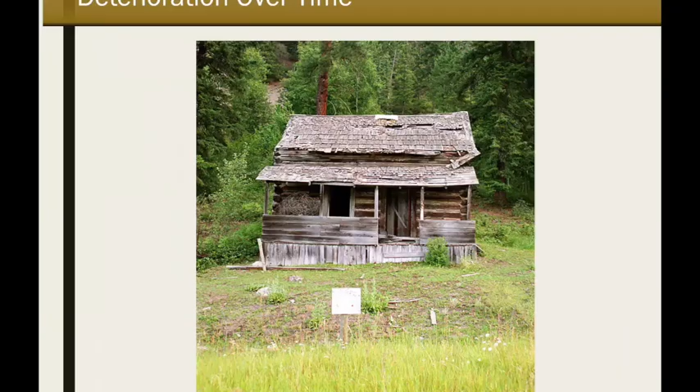Imagine yourself living in this home. Imagine what it would have been like if you'd been living here when this was a brand new structure, when the condition was top notch. The roof was whole and there were no leaks and drafts and so forth.

They were probably there now. As you think about what it would have been like to live here in this home, in this building, do you have any idea of what you would have done to maintain the condition of this home? What would be some of the activities that you would have undertaken? Had you given any thought to how long this may last, or maybe how long you want it to last?

Those are, I think, interesting questions. They may be tied to what your purpose is. Are you going to raise a family here? Or maybe this is just something to visit occasionally. Maybe this is a vacation home, and that affects how long you think you want it to last.

But these are the kinds of questions that I think come up all the time when we own something, and we'd like to take care of it and patch it when it needs patching, repair it when it needs repairing.

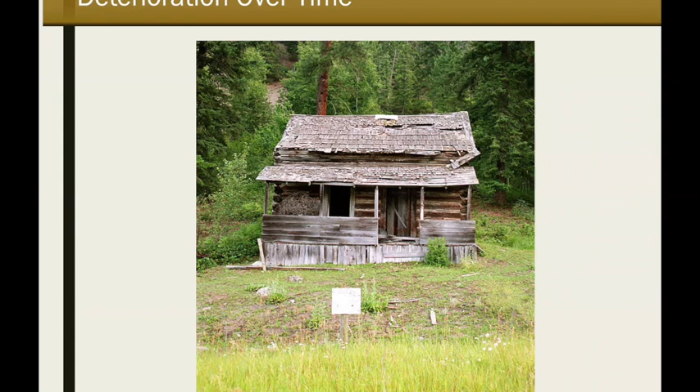So there's probably some science here somewhere that we can start to think about, just on moisture alone. Of course, there's other things involved naturally that determine how a deterioration process will take place. But in this facility, in this home, obviously there's moisture from climatic conditions, from rainfall and whatnot. And we know that when temperatures are different enough that a temperature on one side of a wall, for instance, drops below the dew point, we get condensation and we get moisture forming.

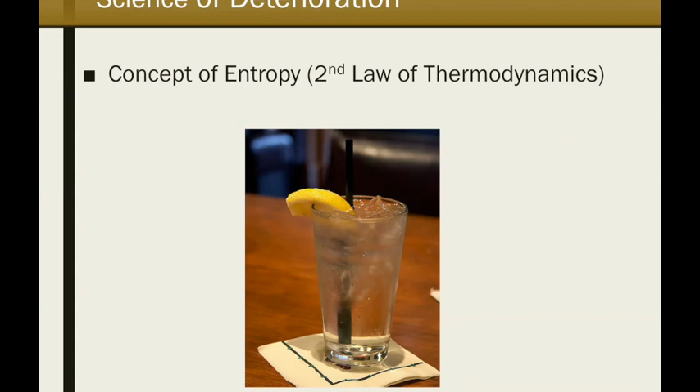So it seems like in one way or another in our infrastructure, moisture comes into play. And that's kind of what I'm getting at today. It could be that the original moisture problem for highways was here.

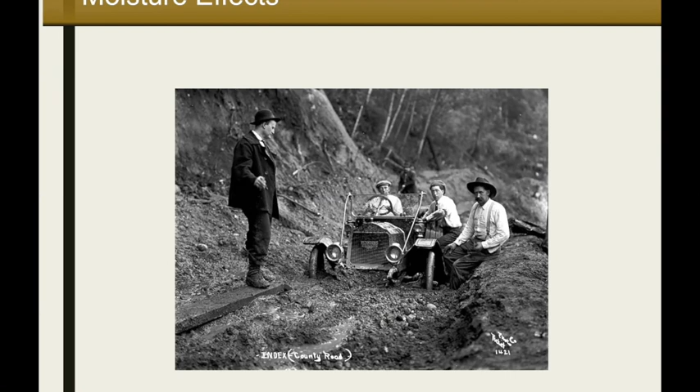When it's not wood anymore, it's soil. We've got a problem here of having to improve the soil layering so we can make it trafficable. Again, we see moisture coming in and having a play here on what we want to get.

As far as our pavement systems go, they're often layered, and the surface of the pavement is the one that's got to be the toughest and generally have the most strength. So we started making our roadways with some type of hardened surface to counteract this problem. That's what the saying of the day was: get the traveling public out of the mud. Well, we do that, and it seems we still get into other things that become important, that inevitably are affected by the presence of moisture.

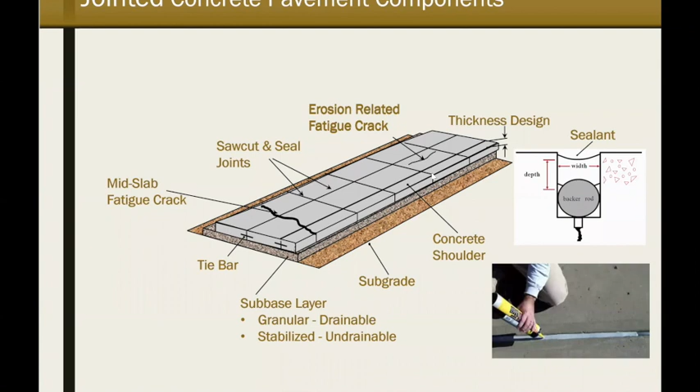In a continuously reinforced pavement, we're not necessarily sealing these cracks. There are joints, longitudinally speaking, that need to be sealed, but they don't move to the extent that a transverse joint in jointed concrete does. So those are some of the differences. I point this out mainly so you understand that the behavior of a concrete pavement system is very important when we talk about its sustainability.

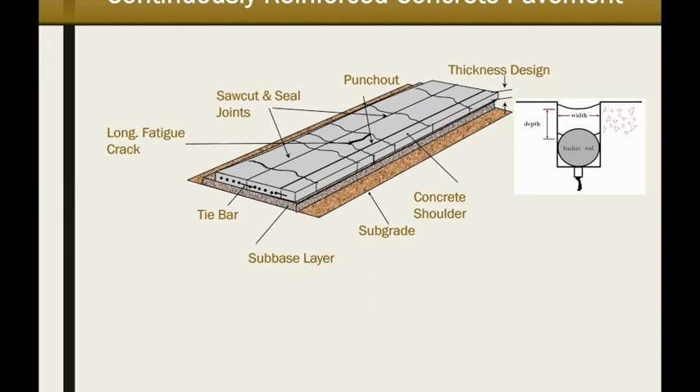In either pavement type, there are systems we worry about in design. One is the jointing system, which we've talked about a little, and there's also the drainage system of the pavement. That's so important. We haven't done much in modeling drainage as much as we need to, and connecting the dots between that and the durability of the system.

But I think we're getting to the point where we can do that, and it's going to come through consideration of the effect that the slab has on the base layer that's supporting it.

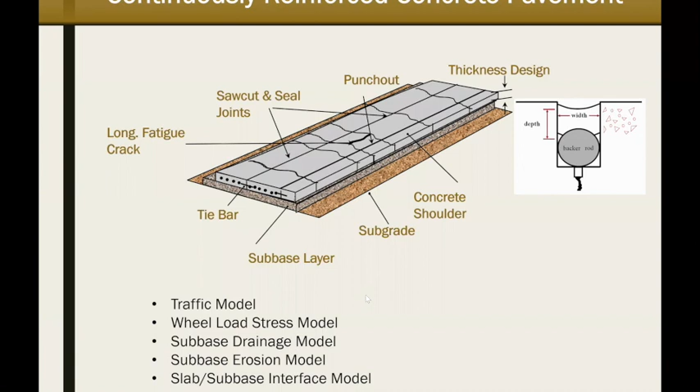This is quite an interesting topic for the concrete pavement community, because there's not a lot of agreement as to what the best subbase design is. There's still a lot there to be explored, and I can't overemphasize the durability aspects the design of the subbase has on the entire pavement system. I'll try to allude to some of that today, but anyway, we've got different types here, and different systems at play.

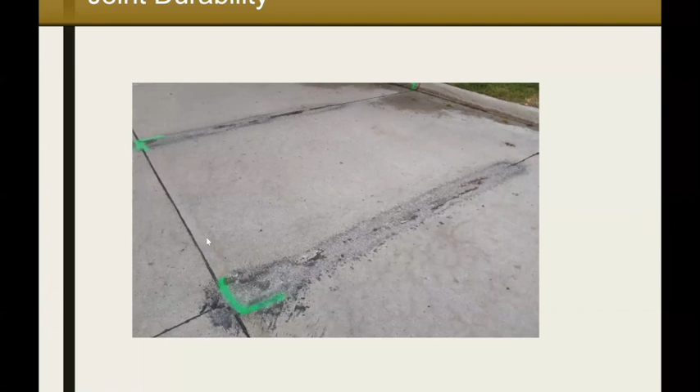But it goes back again to the presence of moisture and what it's doing. Obviously, there's something very wrong here that's gone on. Can we do something to limit that? If water is being trapped here in these areas, can we do something to limit that? I mean, this is really the question I have when I look at this.

So let's just talk about the joint sealant system a little bit. I'm going to review here with what some of the research has been, some of the research that I've been involved with as well. Just mainly as background information on this aspect of the concrete pavement, but this is again a schematic of the jointing system here, and we see again the sealant here.

This is in combination with this backer rod that I mentioned before, and this is a way that the material is shaped. Now, it's normally poured in place. There are preformed systems that are there as well. Of course, they don't need a backer rod if they're preformed, but the ones that are not preformed, they're normally placed with this, and it shapes it in a way that we think optimizes the state of stress.

And so a lot of the research has been focused on what those stress levels are in the sealant system. In our research, we've gone back and revisited a factor here. It's called the shape factor. It's a very simple geometric term. It's just simply the width here divided by the depth. And it's a way of characterizing the installation for the material.

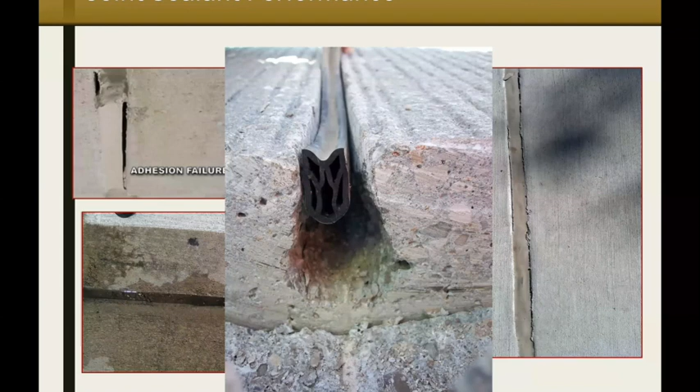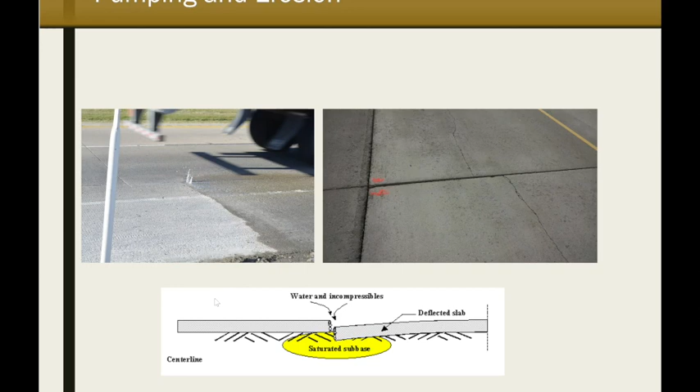This is really an unfortunate situation as far as this discontinuity and jointing goes. Some of our studies in the LTPP database have shown that areas experiencing the most rainfall, their concrete pavements are also experiencing quite a bit of joint faulting. So it really brings into question how effective our joint sealing operations have been. It seems their effectiveness hasn't been what we thought it might have been, and they're certainly not what it should be.

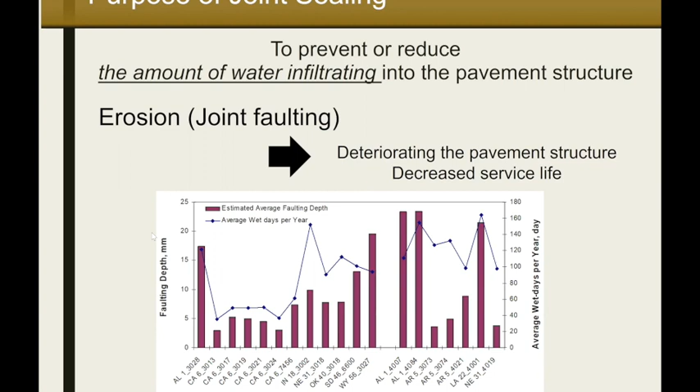This is the effect, the problem of durability and the effect of moisture on concrete pavement across our entire nation. It's not just in Wyoming—this is everywhere. And our design methods, I think, are still not to the point where they need to address this. Design has mainly been a structural activity. It needs to be about durability as well.

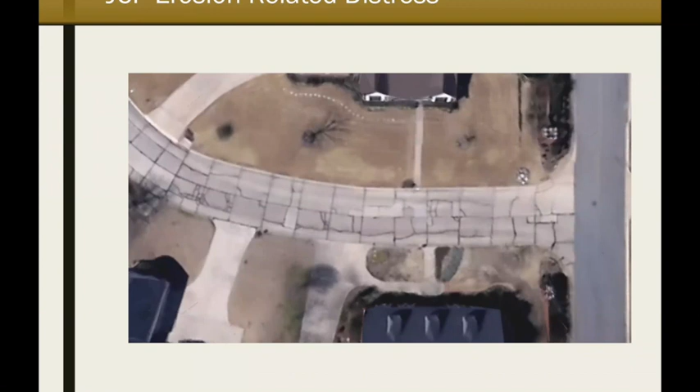Well, I think particularly on this erosion issue it's about understanding a process. I'm going to talk about that a little bit more later on, because right now we're talking about the sealant. But there is a process, I think, behind any deterioration, whether it be a bridge, a superstructure, or corrosion. I think there's a process there that we can all understand and try to incorporate into improving our ability to design and predict this.

In this process, first of all, there's water there—how did it get there? Then there's the material itself, what its resistances are, and then the things that are causing the stresses, which in this case is traffic. These are some of the main elements, and there could be others, but these are the ones that come to mind.

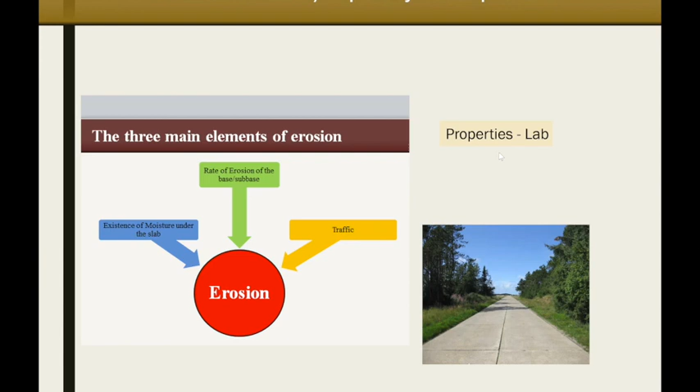So while we're talking about this process, hopefully we can find the lab protocol to help us determine the properties involved. So there's a laboratory component, and then of course the modeling using these properties we've determined, and then the performance.

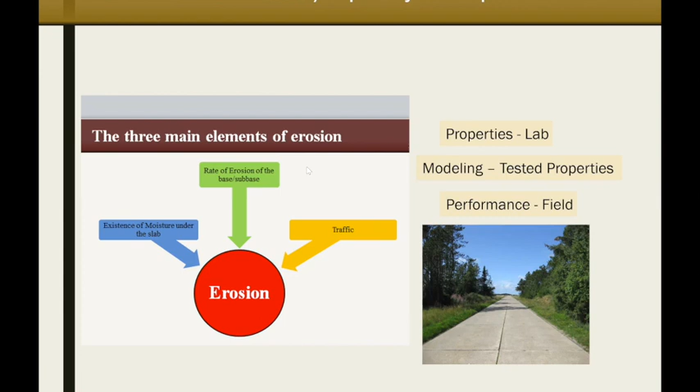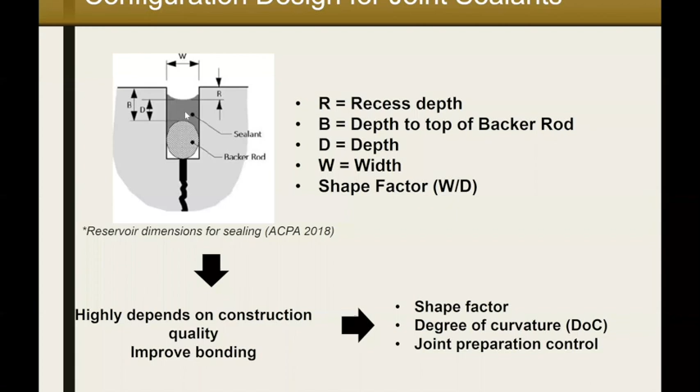All right, now back to the joint sealant. One of the things in research is that over the years we've mainly looked at the sealant material itself and how it stretches. What we've tended to overlook is how this stretching affects the ability of the material to bond to another material. In this case, its bond is what governs the performance. As I alluded to earlier, it's not the ability of the material to stretch and elongate, it's the ability of it to bond.

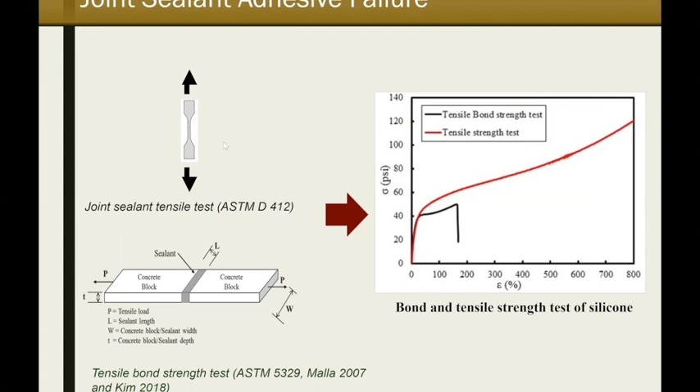I won't say that it can't bond—I'll say that it hasn't bonded, and we have to look at that. In our research, we're looking again at the shape factor, and then we introduced another one here that might be useful, which characterizes the curvature. So we think there may be another factor here that could become important in the design of the system.

I've got some slides here showing combinations of the shape factor and the degree of curvature, and they're saying about the same thing: you can affect the ductility of the system, and you can affect the stress level by manipulating either the shape factor or the degree of curvature.

I won't say how we got different degrees of curvature. It is representing this depth here. We did some specimen preparation in order to do that.

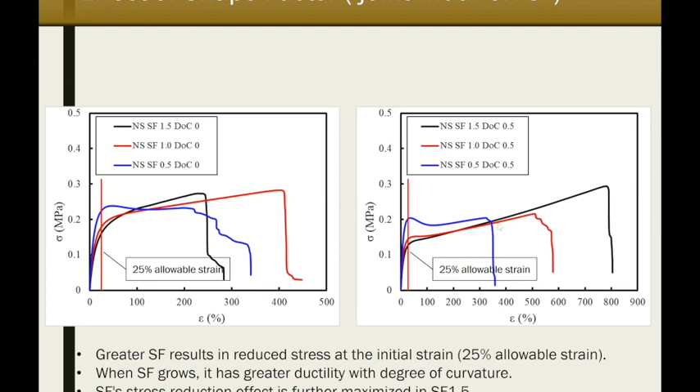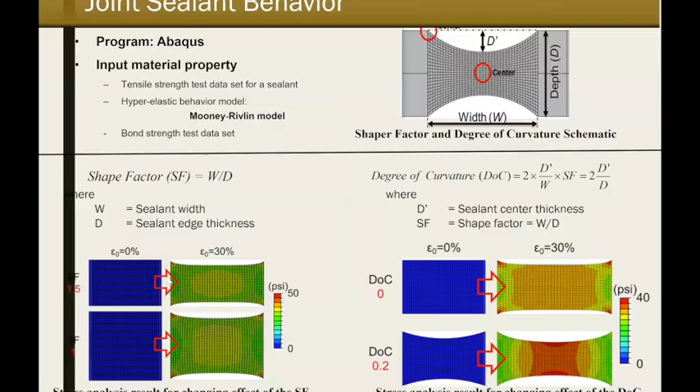Looking at our test results, one conclusion we've come to is that we can adjust the flexibility, which is really the strain level, and we can affect the stress level. But the ultimate factor that overrides all this is what your allowable limit is. Interestingly, if you look at the manufacturer's data, they talk about 100% strain, even 150% strain. But what we're finding is that we can only go to 25% before we're exceeding the capability of the material to bond to the surface of the concrete.

Can we improve that? We ought to figure that out, because it could make a difference. Right now it's pretty low, I would say. And this doesn't even mention the width of the joint or how deep it is—that's what the shape factor is all about.

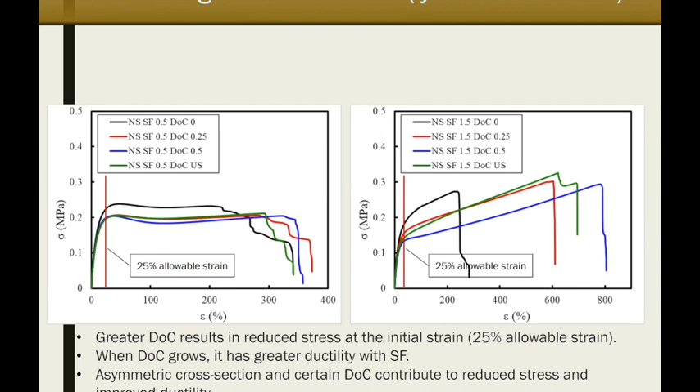Interestingly, today a lot of agencies, if they're sealing, are only cutting the joints 1/8 of an inch in width, or maybe 1/4 inch. If they cut them 1/8 inch, it's really hard to seal them—I'd say they're probably not sealing. But 1/4 inch is pretty narrow too, and when you try to prepare it for sealing, it's really difficult to do.

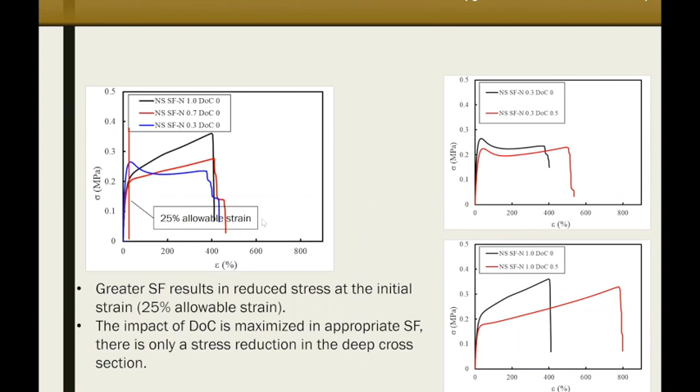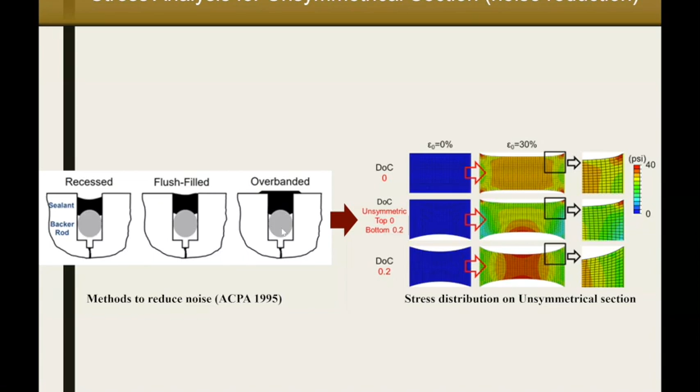But again, the backer rod is there to reduce that stress level. What we found is if you go to this overband option, again to reduce noise, you may as well skip the backer rod, because it's not accomplishing anything for you. This dominates the stress picture, and as a result it debonds at a lower strain. The backer rod doesn't have any benefit at all. So if you're going to do that, don't worry about putting the backer rod in—you're just wasting money.

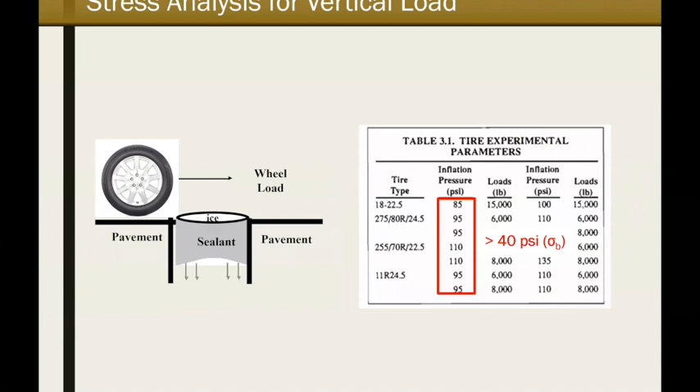Another concern, again in western areas with snowfall, is the buildup of ice on the sealant, and then the load passes over and pushes it down vertically. We're finding, as you might expect, stresses are going to be very high in the corner, and we need deflections of about 80 to 90 mils before this limit becomes a factor.

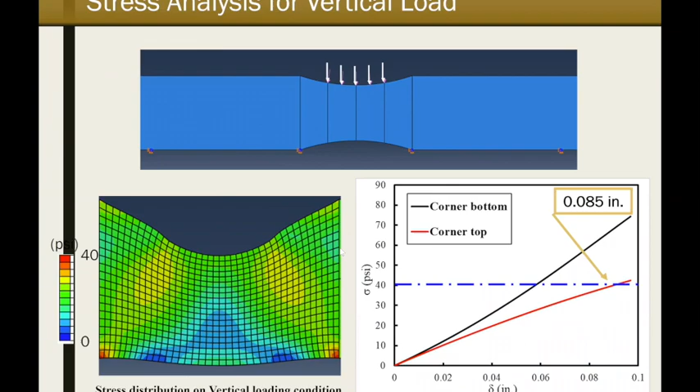So these are just some of the things we've been looking at. I don't have any real conclusions from this yet, but it does appear that there can be an amount of deflection and shoving before it becomes a problem on bonding. We're carrying out bond testing, and I think it's going to change the picture a little on how we design the sealant. One thing it will certainly point out is we've got to do a better job getting the bond to occur, because of the effect it has on the ability to resist infiltration.

And I'm running—I've got to get going.

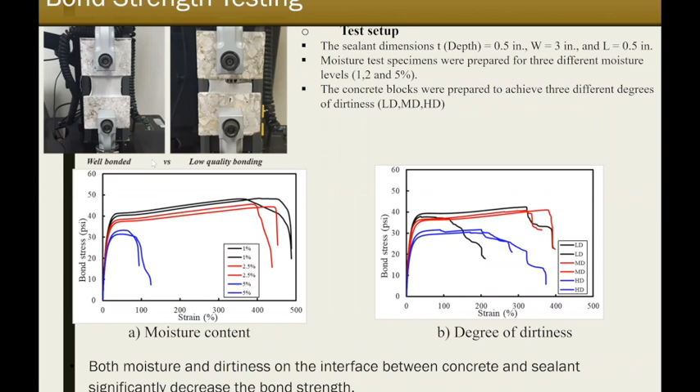Another system I've mentioned is a sub-base, and I don't have enough time here to really discuss it. There are many issues, many factors we have to worry about in order to get a durable sub-base system to support the slab.

Now, we know temperature and so forth will cause it to lift up and separate, but there's also a set condition that gets built into the pavement initially, and I don't want to explain that. There are many interesting aspects behind the construction that I'm learning now, and I think we need to start paying attention to them.

But obviously, the key to support is contact. We have to have contact between the slab and the base. And if there's water in here that is facilitating a wearing process, we're going to lose contact.

So one thing I want to point out is a load deflects the pavement system, and it actually causes a wearing to occur along that interface. This wearing is an abrasion resistance, or an abrasion type stress, and it's that wearing that can cause voiding. If you have water trapped there because of water that got into the sealant system, it can act as a vehicle to transport the worn material away from the interface, and what you end up with is a void. So there's a wearing process taking place.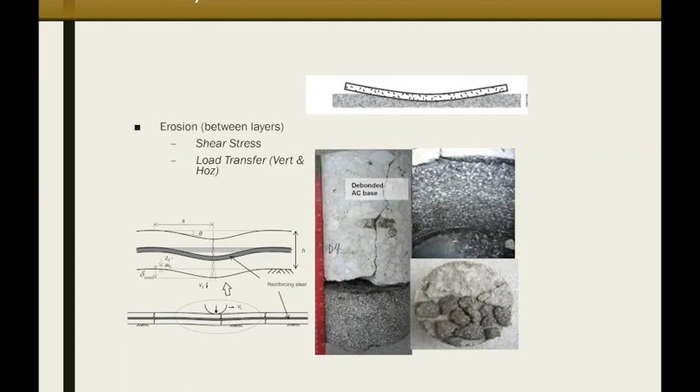And again, this has been recognized to some extent already in the ME software, which I hope you're familiar with. In this modeling, they've recognized that this is something we need to start paying attention to. I'll talk about that a little bit.

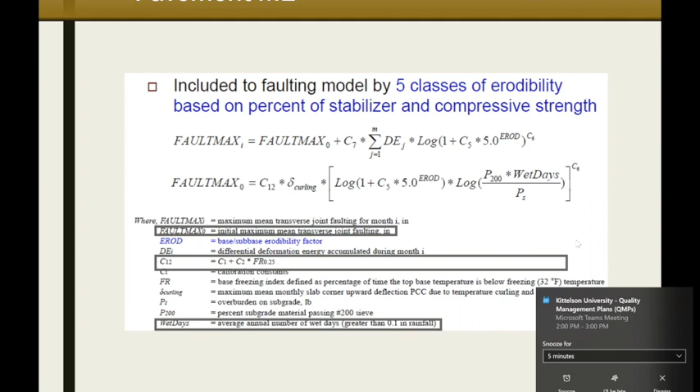The thing that's at play here is the bond. I use the term degree of bond, and I'm talking about bond strength, cohesive strength, frictional resistance. All this comes into play, and it's all affected when water is on that interface and acts as a transport medium to carry the material away.

And you can imagine if the slab is not completely flat, that certainly worsens the situation. So this is now a constructability issue too. I don't have time to explain that fully, but this is a multi-dimensional problem related to durability.

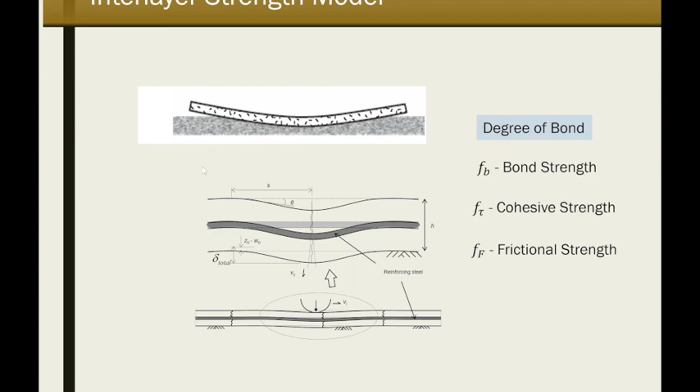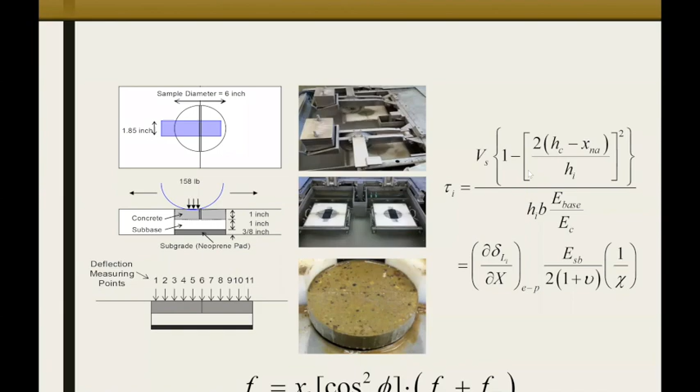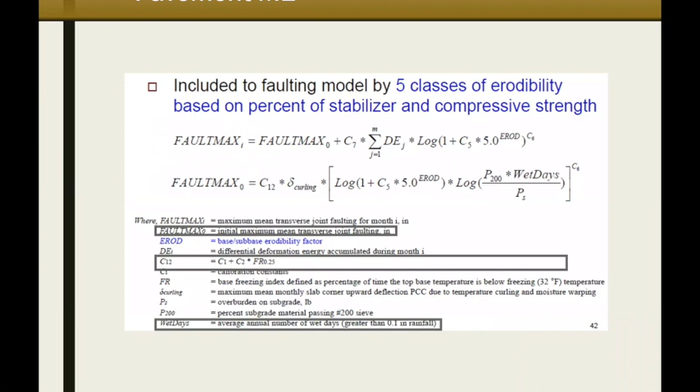Another thing I'll point out in the pavement ME model is this term called wet days. This is intriguing to me because I think it represents the amount of time that water is trapped in a joint system. And right now we don't characterize that too well.

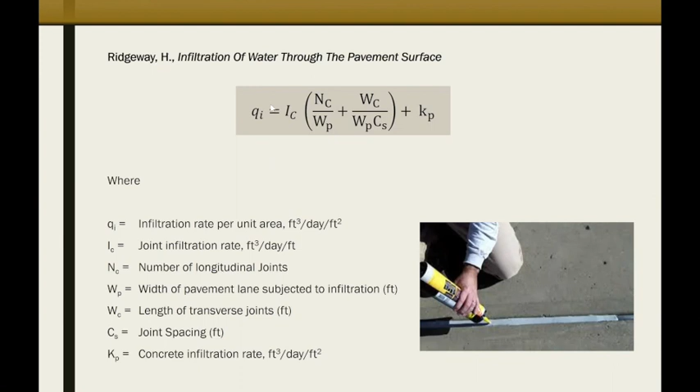I've suggested a modification to an infiltration expression originally developed by Ridgeway some time ago, which is incorporated in some software that the Federal Highway Administration put together. But I did a modification to this expression by developing an infiltration component.

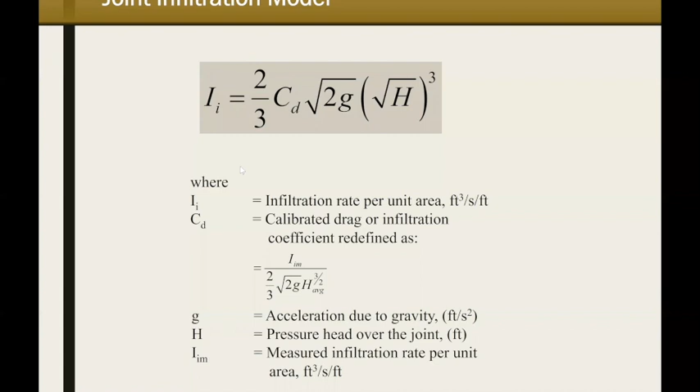Not a lot of water there in Arizona, but we found that the sealant in this part here was holding up quite well—so well that there was almost no water going through. However, as we went to the edge of the pavement system, to the edges of the lane, and tested that, the infiltration we couldn't keep up with. We'd pour the water in and it would run out immediately. So there's a huge difference in the durability of the joint just across the lane.

That's another factor we need to pay attention to. But I got enough of this data that I could calibrate this coefficient here, the infiltration coefficient.

And we did that here by using conventional hydraulic terms that y'all may be familiar with, but got a very convenient expression here, and then we can use it in the prediction of infiltration.

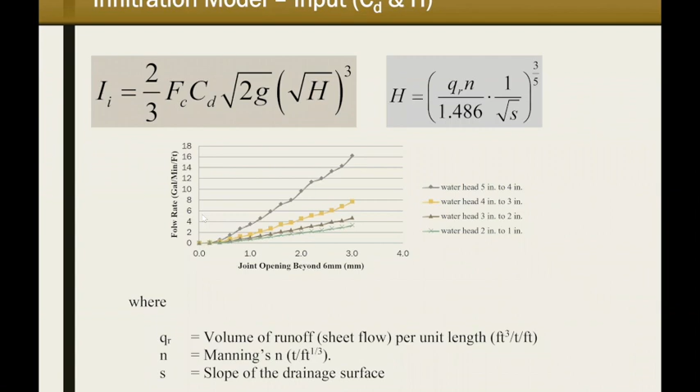Now the other factor that comes into play is a coefficient related to the amount of dirtiness on the edge of the sealant. The dirtiness, as it turns out, affects the ability to bond, and it may be one of the reasons why we see premature debonding in joint systems.

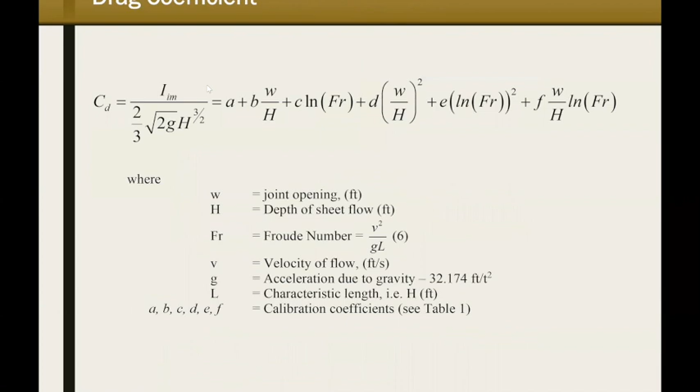But we took that into account, and these expressions can be used to determine the amount of time that a pavement may be saturated with water in the vicinity of the joint. It's an easy thing to do. We can calculate infiltration and exfiltration based on the characteristics of the base.

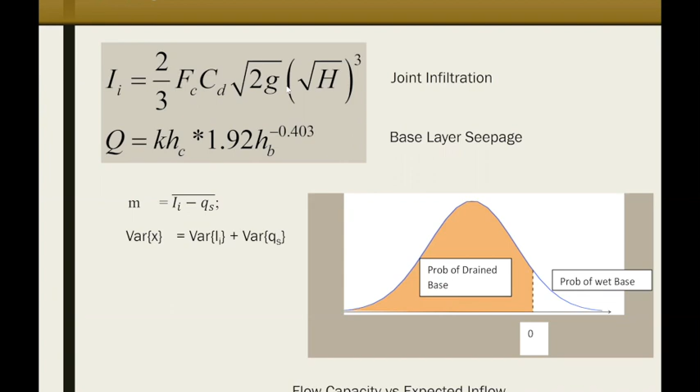Using those two expressions, we can determine a probability that the base is going to be wet for a certain time of the year, and that's what my definition of number of wet days is. This is a little different than pavement ME uses, but it's the kind of parameter I think we need to get a handle on, so we know what our sealant systems are doing, how much water the pavement is being subjected to year in and year out, and what kind of resistance we have to have.

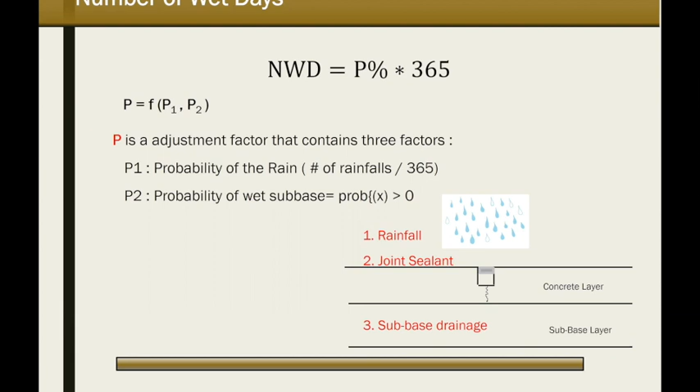Now, just to help this along, I've got a test site set up in Oklahoma of an approach slab that was subjected to an enormous amount of water over its design that caused it to fail. And we rehabilitated the approach slab by putting precast slabs in that had joints at a closer interval.

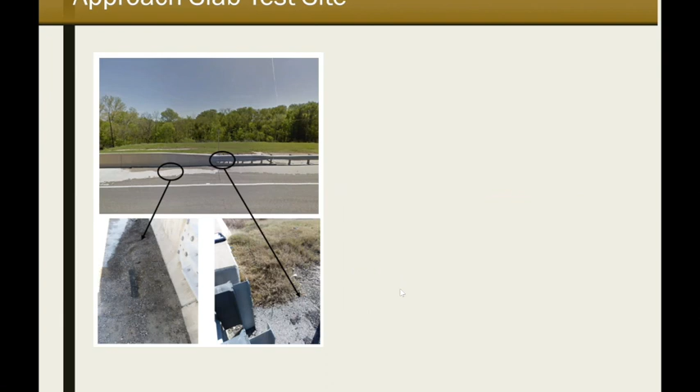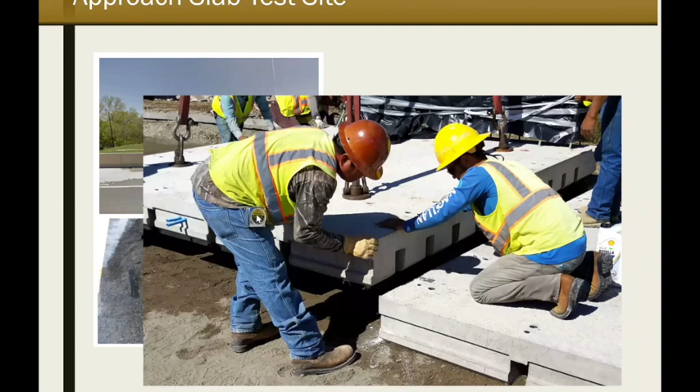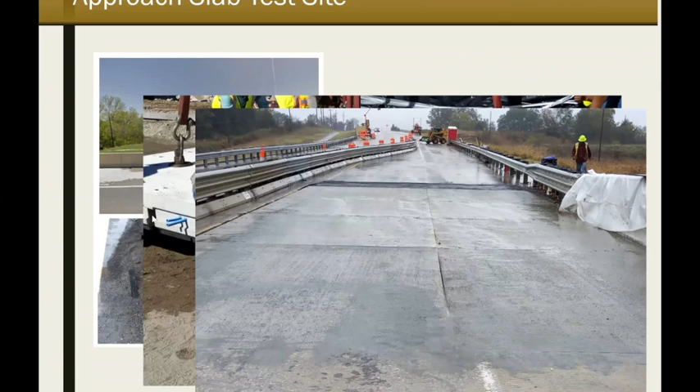Now, I'm a little disappointed that there is any infiltration, but there is some here that's taking place. So we're tracking that, and again, it's in an effort to model here what the infiltration will be. So can we seal it up and prevent infiltration? This is an important question that I think we need to understand. I'm convinced we can, but we'll try and learn more about that.

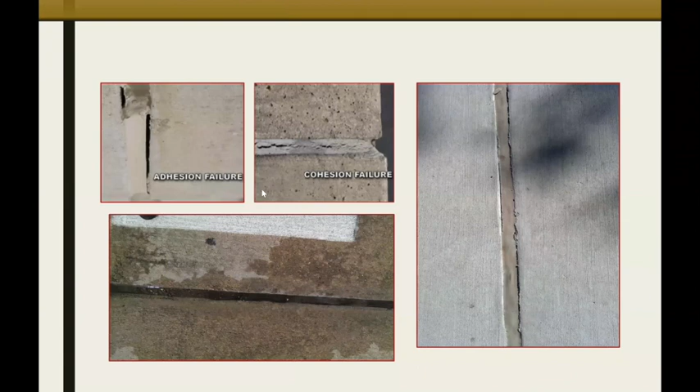Now, I mentioned dirtiness a little bit because dirtiness affects the bond strength of the material as it affects its ability to adhere to the surface. So we've been studying that in the laboratory, and ways to characterize the moisture level and the effect that it has on bond. We've done some interesting things here, both non-destructively and destructively.

But what we're attempting to do is characterize the bond strength and contrast that with the stress of the interface. So we've done a lot of finite element work to get that. This is a lot of laboratory work we're doing, and we're running tests, as you can see here, and seeing the limits where bonding is taking place.

But the interesting thing about this is that, I thought I had another slide here, but I guess I don't. Let's see, yeah, so we're seeing both dirtiness and moisture affect the ability of the material to bond.

And so this becomes, again, a constructability matter. It's interesting how constructability is affecting the long-term durability of some of our systems. And I think we've got to start recognizing that and tying that to the process that we see that's associated with the deterioration.

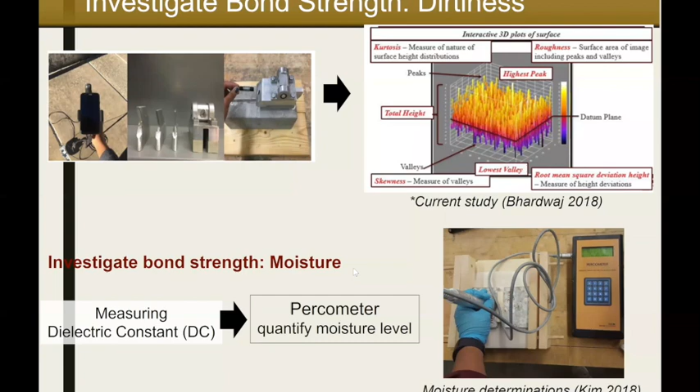Well, again, it's been very interesting to see the effects here of moisture content and dirtiness on the surface of the interface there. I had some results here I want to show you, but I guess they're not coming up. Anyway, let me just say that I'm at the end of my presentation here. Again, I want to emphasize the process of deterioration, understanding that, and then characterizing that.

And that's where we begin to see places where we can apply the science of materials and behavior and so forth to take advantage of that, so we can characterize the damage levels and the processes going on.

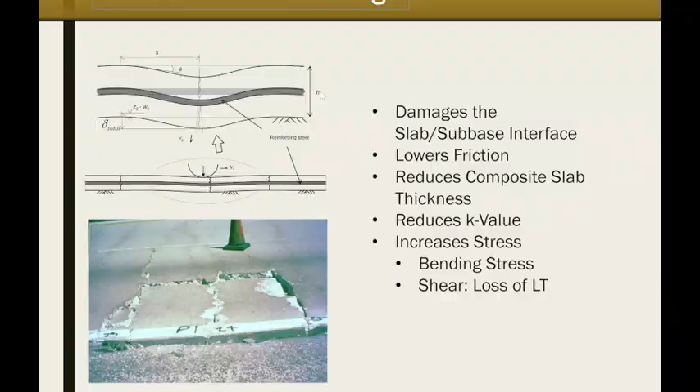Here's an example of how damage at the interface affects the interaction between the layers and the result it has on bending stress and design. That's a great connection we can hopefully tie to the cracking models we use. This follows the same pattern used in the pavement ME program, but enhances it with better characterization of the process.

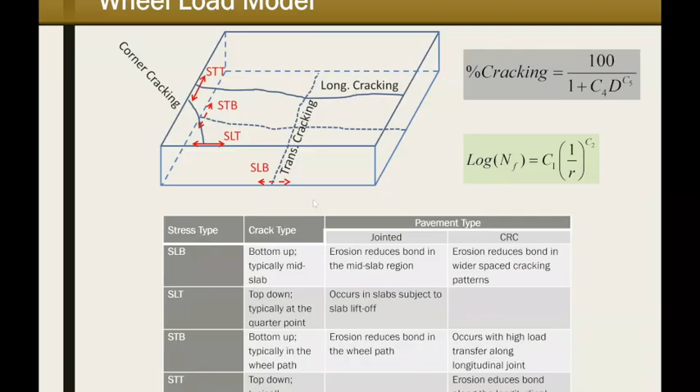I think the potential here is very good. We can work out damage schemes and ultimately come up with better predictions of performance and longevity. That's kind of what our center is about.

I've taken the bulk of my time and didn't leave much for questions, I apologize for that. But in summary, accounting for the presence of moisture in a pavement system affects the joints and the sub base. There's a huge impact here, and it's very much a part of the durability picture. It's interesting how different behavior characteristics come into play, especially by pavement type, and how that interacts with the ability to drain it and keep the materials functional and in the strength ranges needed to provide the life we require.

Bottom line, we've got to develop a great performance modeling capability. We need to do that, and we want to keep that in mind as one of the final products we end up with. Anyway, I appreciate your time. I'm at the end of my presentation, and if there are any questions, I'll be happy to try to answer them. If not, I appreciate your time.

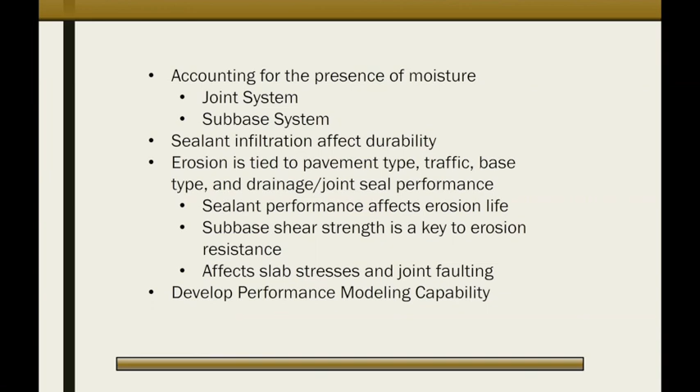If you use pixel analysis software, you can characterize the pixel shape and decipher the level of dirtiness. You'd also have to keep track of the amount of dirt on the interface, which we do by concentration. So you keep that information along with your texture numbers, and you can do some amazing things with that. I like it because it's non-destructive, it can be done very quickly, and over a wide extent of a project - that would be invaluable information for installers. That's what we need to get to, I believe. Anyway, we're doing it with imaging, and it seems to be so far so good.